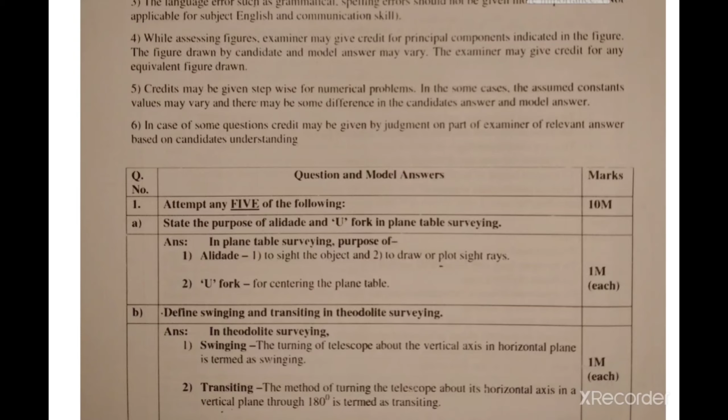Next question, define swinging and transiting in theodolite surveying. In theodolite surveying, swinging: the turning of the telescope about the vertical axis in the horizontal plane is termed as swinging. Transiting: the method of turning the telescope about its horizontal axis in a vertical plane through 180 degrees is termed as transiting.

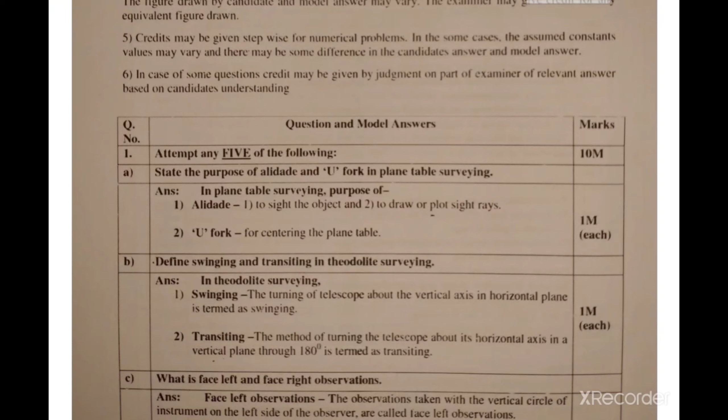What are face left and face right observations? Answer: face left observations, the observations taken with the vertical circle of the instrument on the left side of the observer, are called face left observations. Face right observations, the observations taken with the vertical circle of the instrument on the right side of the observer, are called face right observations.

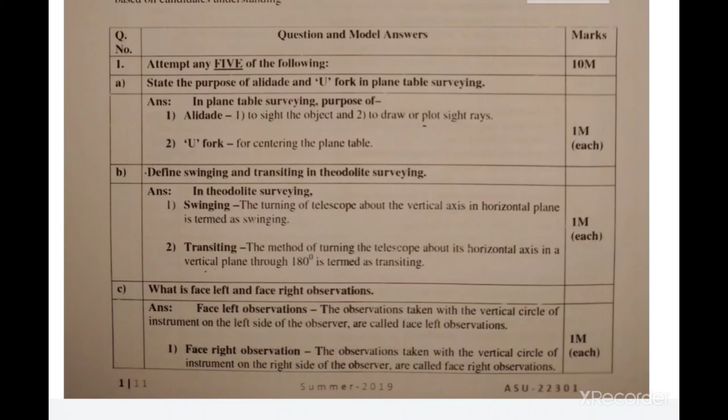After that, friends, state the principle of tacheometry. The principle of tacheometry is based on the property of isosceles triangles, where the ratio of the distance from the apex and the length of the base is always constant. d1/s1 = d2/s2 = d3/s3 = f/i = constant, where f is the focal length and i is the stadia intercept. Note: students may draw a figure to explain the principle. Give credit as 1 mark for figure and 1 mark for equation.

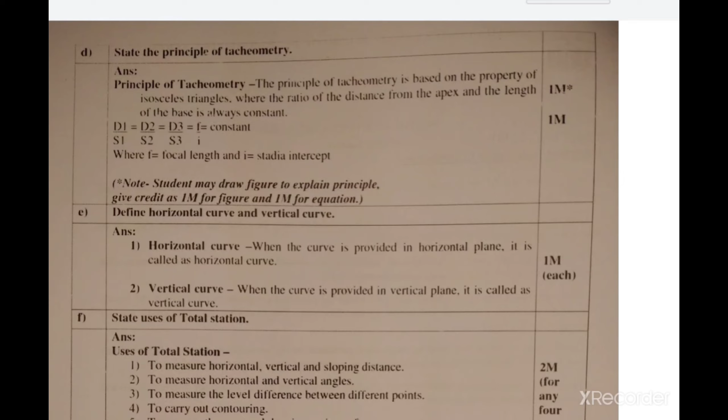Next question, state uses of total stations. Answer, uses of total station: to measure horizontal, vertical and sloping distance, to measure horizontal and vertical angles, to measure the level difference between different points, to carry out contouring, to prepare maps and drawings using software, to prepare layout of building, to measure area and volume.

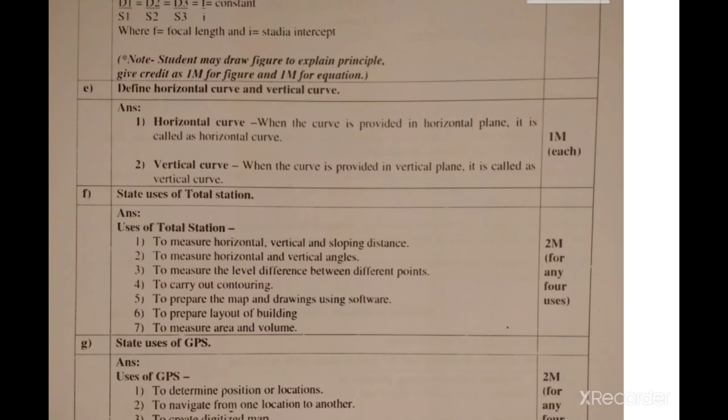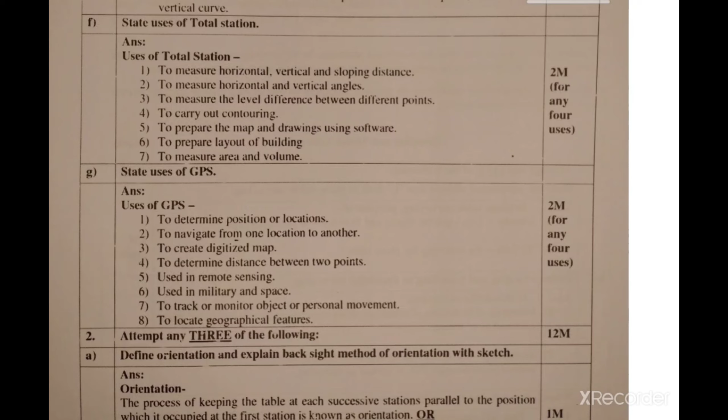The next question is state uses of GPS. Uses of GPS: to determine position or locations, to navigate from one location to another, to create digitized maps, to determine distance between two points, used in remote sensing, used in military and space, to track or monitor object or personal movement, to locate geographical features.

Attempt any three of the following, 12 marks. A. Define orientation and explain backsight method of orientation with sketch. Answer. Orientation: the process of keeping the table at each successive station parallel to the position which it occupied at the first station is known as orientation, or the process by which the positions occupied by the board at various survey stations are kept parallel is known as orientation.

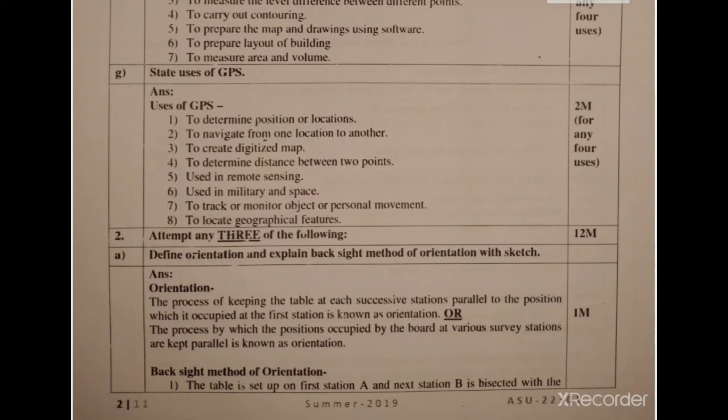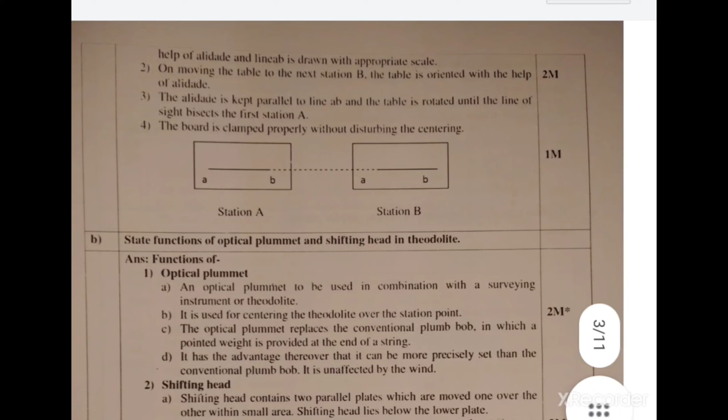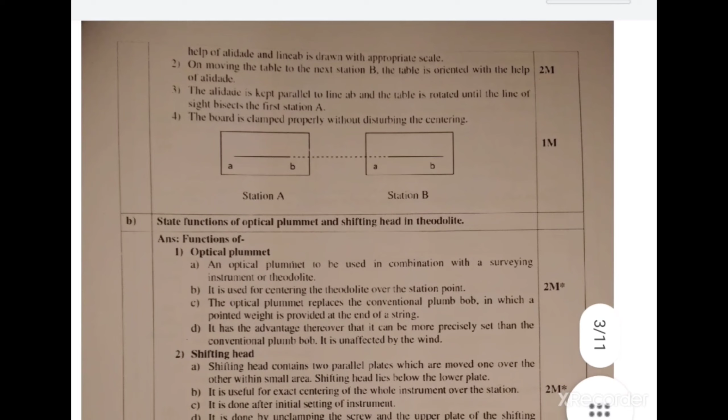Backsight method of orientation: the table is set up on first station A and next station B is bisected with the help of alidade, and line AB is drawn with appropriate scale. On moving the table to the next station B, the table is oriented with the help of alidade. The alidade is kept parallel to line AB and the table is rotated until the line of sight bisects the first station A. The board is clamped properly without disturbing the centering.

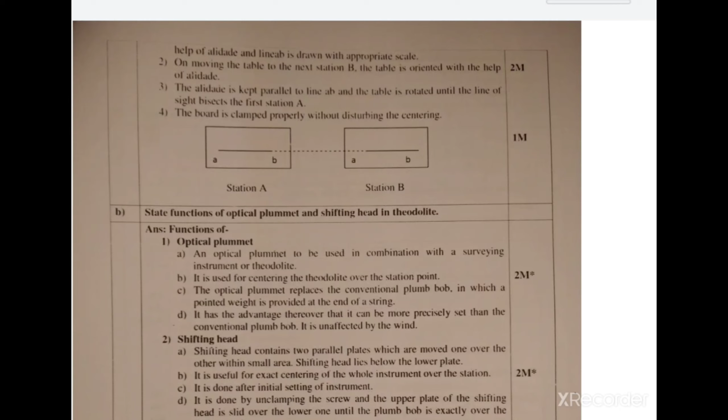Shifting head. The shifting head contains two parallel plates which are moved one over the other within a small area. The shifting head lies below the lower plate. It is useful for exact centering of the whole instrument over the station. It is done after initial setting of the instrument, by unclamping the screw, and the upper plate of the shifting head is slid over the lower one until the plumb bob is exactly over the station mark. 2 marks for any 2 points.

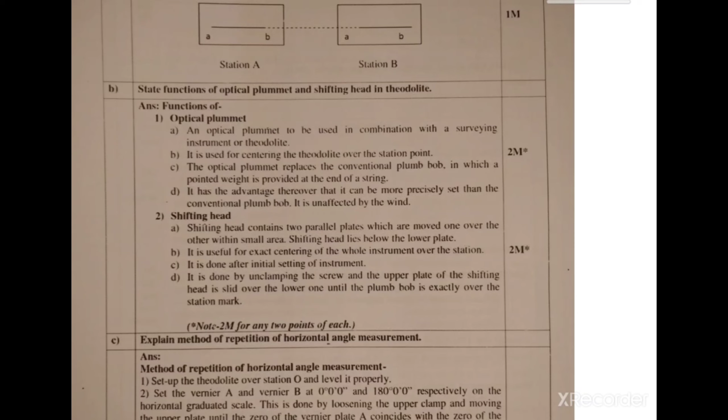Explain the method of repetition of horizontal angle measurement. Answer.

Method of repetition of horizontal angle measurement. Set up the theodolite over station O and level it properly. Set the vernier A and vernier B at 0°0'0" and 180°0'0" respectively on the horizontal graduated scale. This is done by loosening the upper clamp and moving the upper plate until the zero of the vernier plate A coincides with the zero of the main scale.

Tighten both the clamps. Loosen the lower clamp and bisect point A, and readings in vernier A and vernier B should be 0°0'0" and 180°0'0" respectively. Minor adjustment in reading is done by lower tangent screw. Loosen the upper clamp and bisect point B. Point B is accurately bisected using upper tangent screw. Tighten both the clamps and note the reading in both verniers.

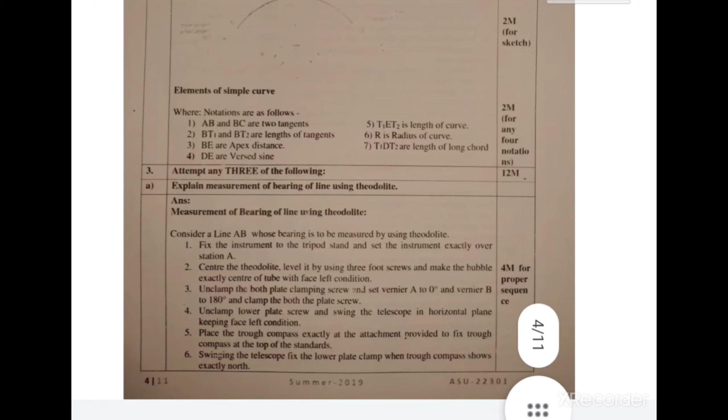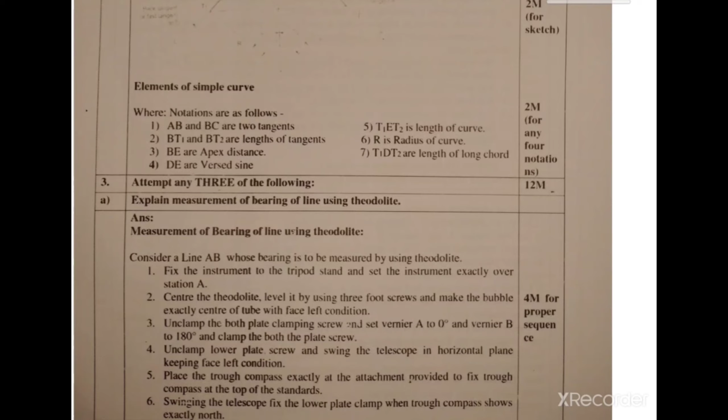Elements of simple curve.

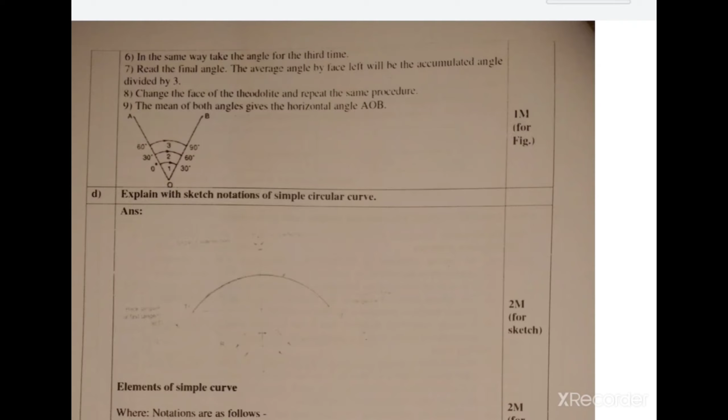The next question, explain the sketch notations of simple circular curve.

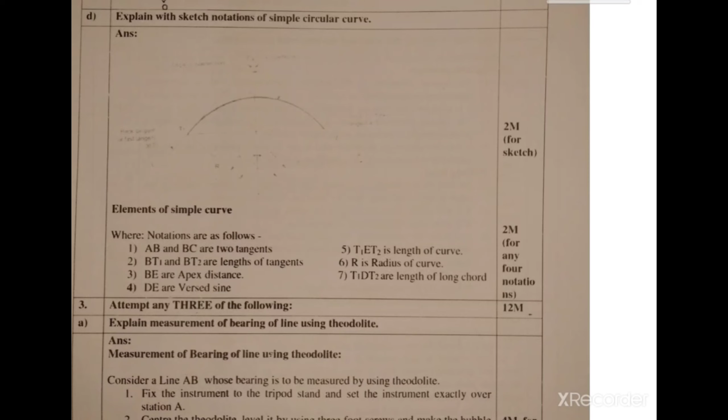BE is apex distance. DE is versed sine. T1ET2 is length of curve. R is radius of curve. Attempt any three of the following.

Explain measurement of bearing of line using theodolite. Answer: measurement of bearing of line using theodolite. Consider a line AB whose bearing is to be measured by using theodolite. Fix the instrument to the tripod stand and set the instrument exactly over station A. Center the theodolite, level it by using the three foot screws and make the bubble exactly central in the tube with face left condition.

Unclamp both plate clamping screws, set vernier A to 0 degrees and vernier B to 180 degrees, and clamp both the plate screws. Unclamp the lower plate screw and swing the telescope in horizontal plane keeping face left condition. Place the trough compass exactly at the attachment provided at the top of the standards. Swinging the telescope, fix the lower plate clamp when the trough compass shows exactly north.

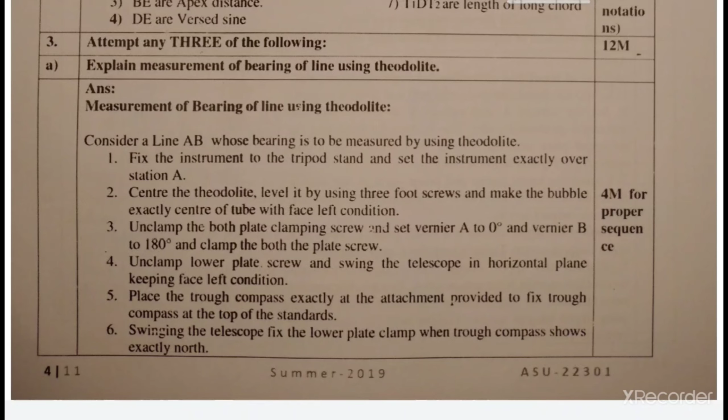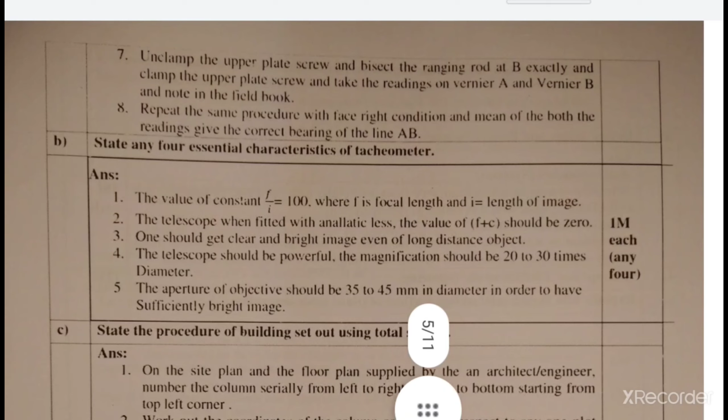Unclamp the upper plate screw, bisect the ranging rod at B exactly, clamp the upper plate screw, take the readings on vernier A and vernier B and note them in the field book. Repeat the same procedure with face right condition, and the mean of both readings gives the correct bearing of the line AB. State any 4 essential characteristics of tacheometer.

Answer: 1. The value of constant f/i is equal to 100, where f is focal length and i is length of image. 2. The telescope should be fitted with anallactic lens and the value of f + c should be 0. One should get a clear and bright image even of a long distance object.

The telescope should be powerful. The magnification should be 20 to 30 diameters. 5. The aperture of objective should be 35 to 45 mm in diameter in order to have a sufficiently bright image.

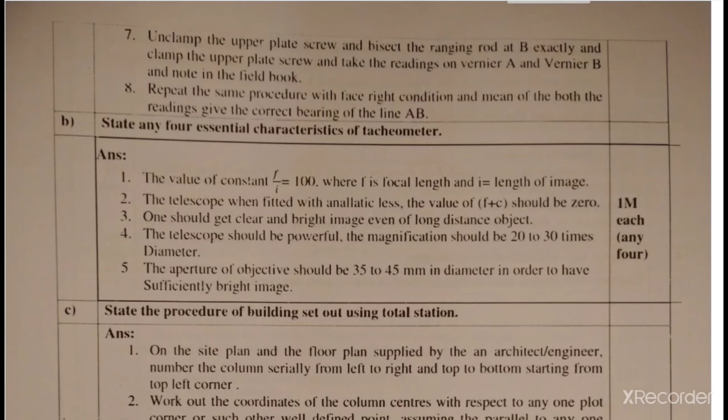State the procedure of building set out using total station. 1. On the site plan and the floor plan supplied by an architect engineer, number the columns serially from left to right and top to bottom, starting from the top left corner. 2. Work out the

coordinates of the column centers with respect to any one plot corner or such other well-defined point, assuming the parallel to any one building face as meridian. In case of a load-bearing building, one should work out coordinates at the points of intersection of all center lines.

Create on your personal computer an Excel document with 4 independent columns: one for column number and the rest 3 for N, E and H coordinates. Upload this file to your total station instrument by making use of the communication transfer software provided with the total station. Such software is invariably required to establish an interface between the external computer and the total station instrument.

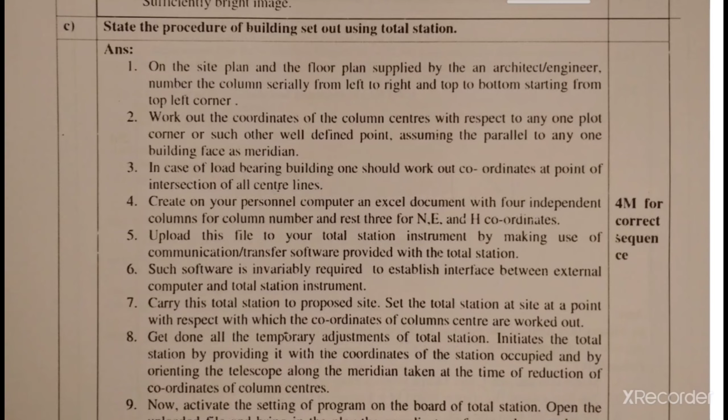Now, activate the setting out program on the board of the total station. Open the uploaded file and bring into display the coordinates of any column to be set out. 10. Hold the prism pole at the tentative position of that column on the ground. Bisect it and get its coordinates measured. In the next second, the machine will display the discrepancies in the coordinates of the point occupied and the point to be set out.

Get it understood, direct the reflector man accordingly to occupy the new position, bisect it again and get its coordinates measured to know the discrepancy in the coordinates of the point occupied and the point to be set out. Repeat the process till you get no discrepancy in the coordinates of the point occupied and the point to be set out. This way, get marked the centers of the rest of the columns.

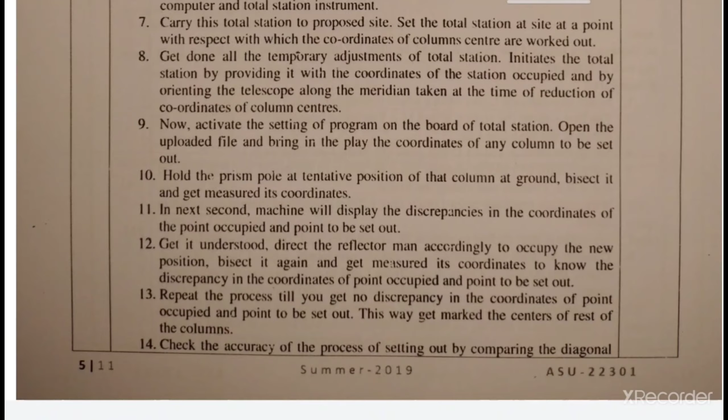Check the accuracy of the process of setting out by comparing the diagonal distances between the extreme column centers to their calculated values. The points so marked may be transferred to the sight rails on the sides so that they can be easily referred to by the workmen from time to time when the construction of the foundation is in progress.

Next question, define active and passive sources. Answer: active source system. The system in which irradiance from artificially generated energy sources such as radar is used is called an active system. Passive source system: the system in which the sun and earth's materials are used as natural sources so as to radiate electromagnetic energy of variable wavelength is called a passive system.

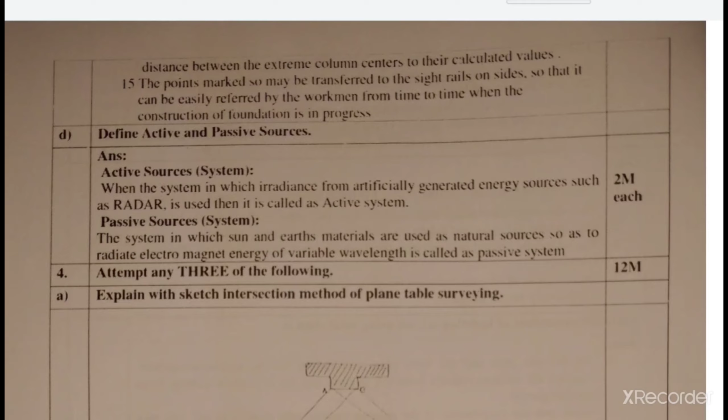Question 4. Attempt any three of the following. Question: explain with sketch the intersection method of plane table surveying.

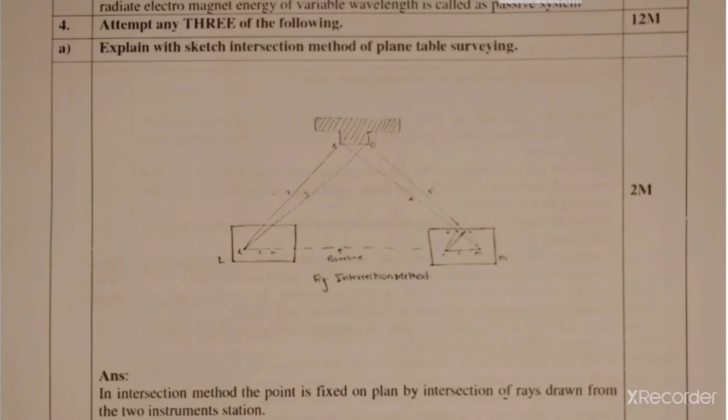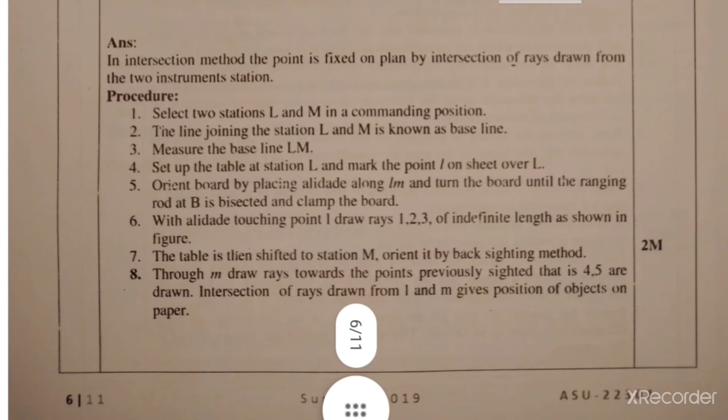In the intersection method, the point is fixed on the plan by the intersection of rays drawn from the 2 instrument stations. Procedure: select 2 stations L and M in a commanding position. The line joining stations L and M is known as the baseline. Measure the baseline LM. Set up the table at station L and mark the point L on the sheet over L. Orient the board by placing the alidade along LM and turn the board until the ranging rod at M is bisected and

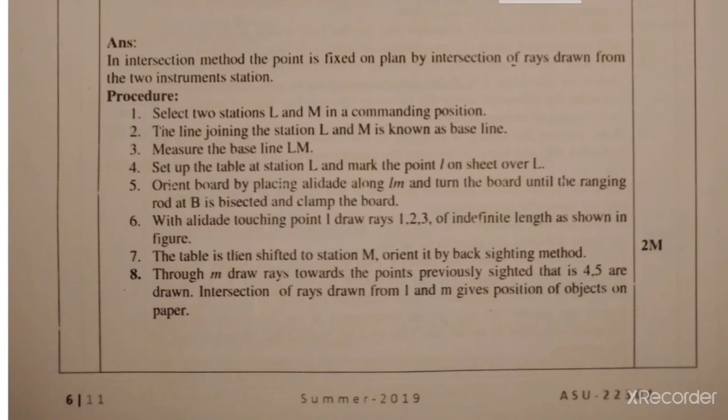clamp the board. With the alidade touching point L, draw rays 1, 2, 3 of indefinite length as shown in the figure. The table is then shifted to station M. Orient it by the back sighting method. Through M, draw rays towards the points previously sighted, that is 4, 5 are drawn. The intersection of rays drawn from L and M gives the position of objects on paper.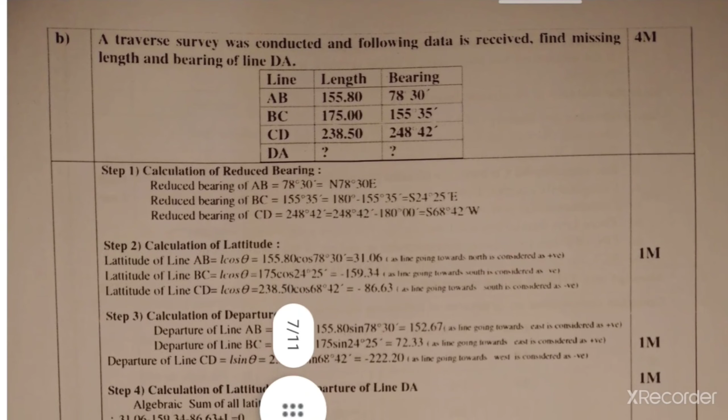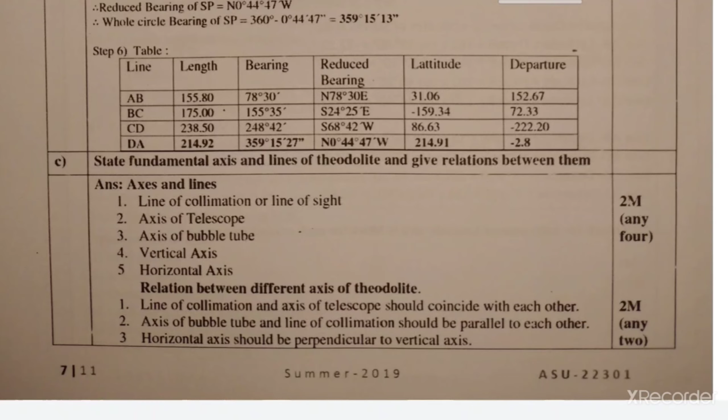Axes and lines: line of collimation or line of sight, axis of telescope, axis of bubble tube, vertical axis, horizontal axis. Relation between different axes of theodolite: the line of collimation and axis of telescope should coincide with each other. The axis of bubble tube and line of collimation should be parallel to each other. The horizontal axis should be perpendicular to the vertical axis.

Axis of plate level must be perpendicular to vertical axis. If the instrument has fixed vertical circle verniers, it must read 0 in leveled position.

State the features of electronic theodolite. Answer: Following are features of electronic theodolite: dual side display and keyboard with push button keys, built-in illumination for night operations, rechargeable nickel cadmium battery with auto power cutoff, compatibility with EDMS, communication port with RS-232C compatibility. Three keys commonly used are on-off key for starting or ending the measurement, and RCL for recalling data from memory as well as changing sign plus or minus.

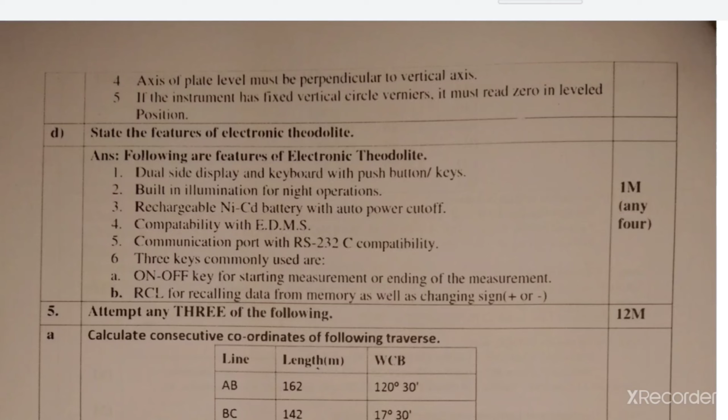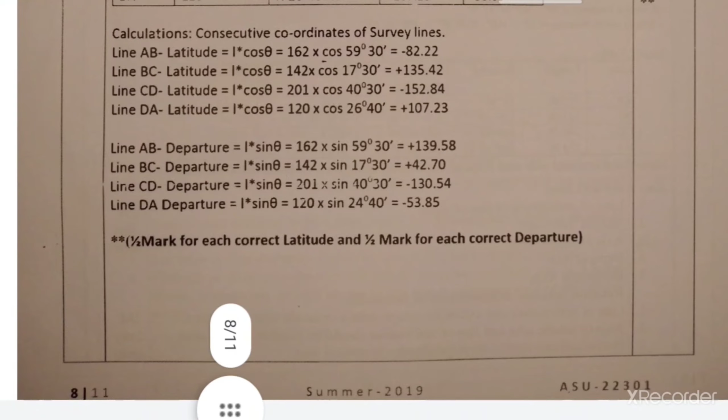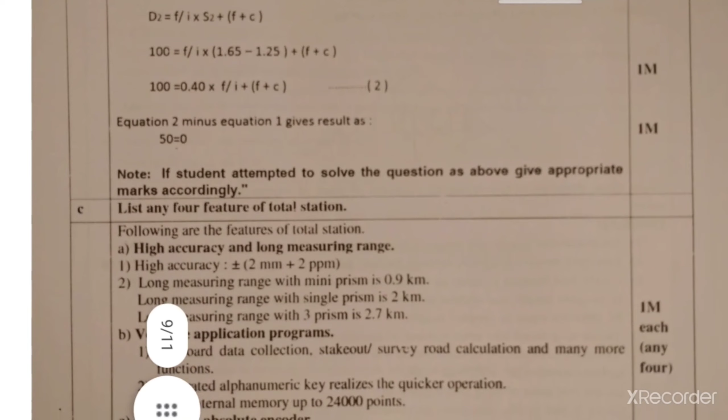Question 5, attempt any 3 of the following. This question is actually a sum, which will be taken in the next lecture. The next question is also a sum, so we will skip them.

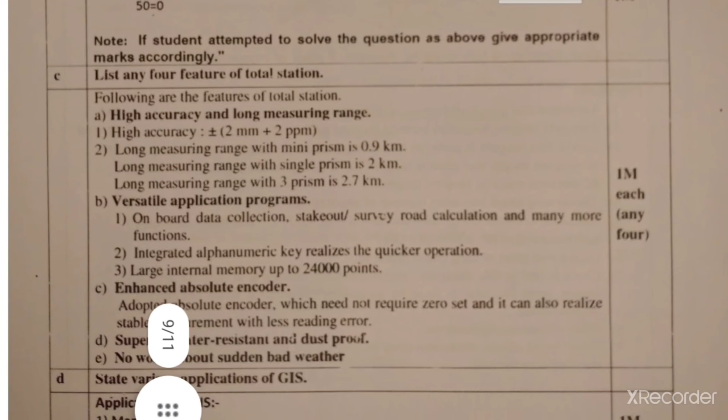Next question: list any 4 features of total stations. Following are the features of total station: high accuracy and long measuring range. High accuracy plus minus 2 mm plus 2 ppm. Long measuring range with mini prism is 0.9 km. Long measuring range with single prism is 2 km. Long measuring range with 3 prism is 2.7 km.

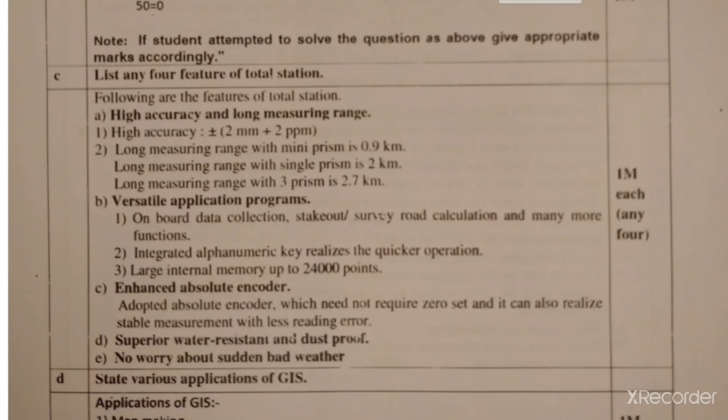Versatile application programs: onboard data collection, stakeout survey, road calculation, and many more functions. Integrated alphanumeric key realizes quicker operation. Large internal memory up to 24,000 points. Enhanced absolute encoder is adopted which need not require zero set, and it can also realize stable measurement with less reading error. Superior water resistance and dust proof, so no worry about sudden bad weather.

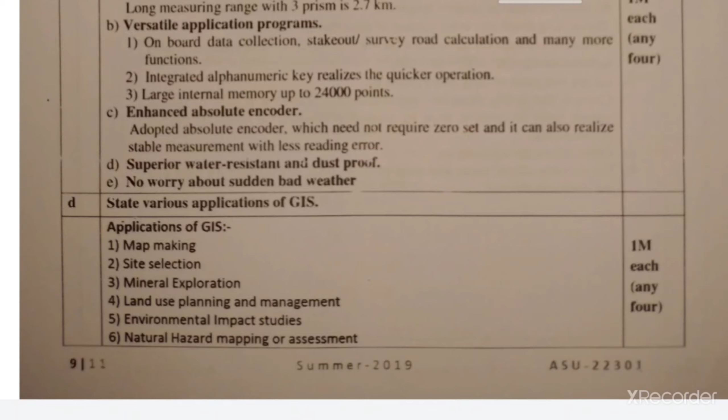Next question: state various applications of GIS. Map making, site selection, mineral exploration, land use planning and management, environmental impact studies, natural hazard mapping or assessment, water resources availability, and road network analysis and planning.

Question 6, attempt any 3 of the following, 12 marks. State errors eliminated by the method of repetition. The errors eliminated by the repetition method are: errors due to eccentricity of verniers and centers, which are eliminated by taking both vernier readings and averaging them.

Errors due to inadjustments of line of collimation and trunnion axes are eliminated by taking both face left and face right readings. Errors due to inaccurate graduations are eliminated by taking readings at different parts of the circle. Errors due to inaccurate bisections of the object may compensate each other. Errors due to improper leveling can be minimized.

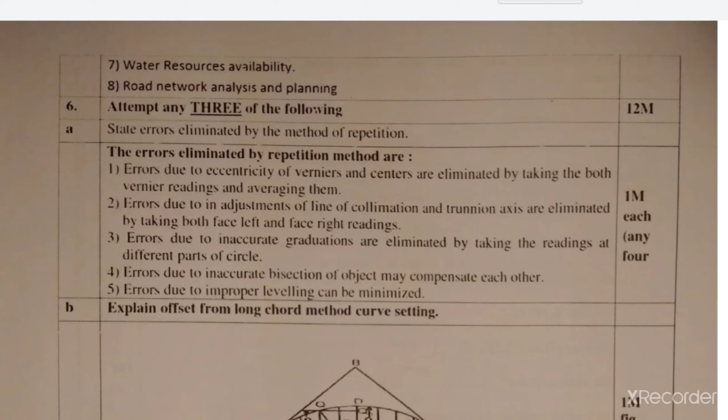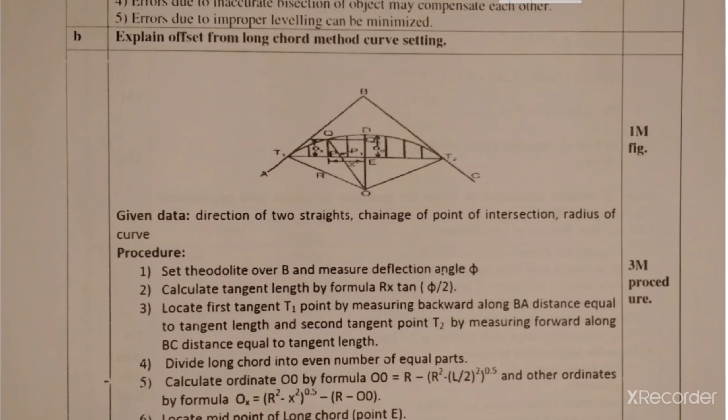Next question: explain offset from long chord method of curve setting. Given data: direction of two straights, chainage of point of intersection, radius of curve. Procedure: set theodolite over B and measure deflection angle phi. Calculate tangent length by formula R multiplied by tan phi by 2.

Locate the first tangent point T1 by measuring backward along BA a distance equal to tangent length, and the second tangent point T2 by measuring forward along BC a distance equal to tangent length. Divide the long chord into an even number of equal parts. Calculate ordinate O0 by the formula O0 equals R minus the square root of R square minus L upon 2 square.

Calculate other ordinates by the formula OX equals square root of R square minus X square, minus R minus O0. Locate the midpoint of the long chord, point E. Chain is laid in the ET1 direction. Perpendicular is erected at E, say by optical square.

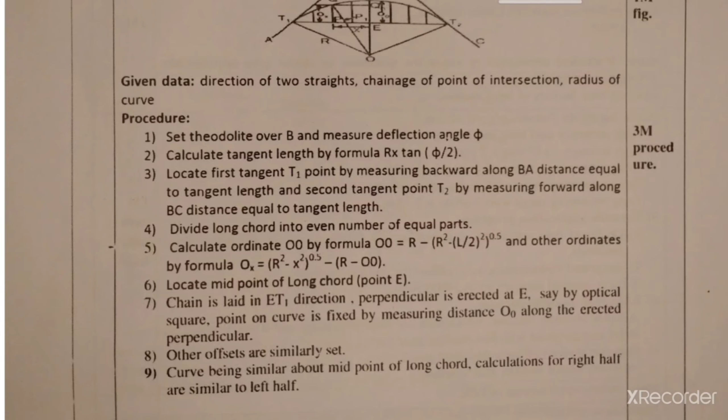The point on the curve is fixed by measuring distance O0 along the erected perpendicular. Other offsets are similarly set. The curve is symmetric about the midpoint of the long chord, so calculations for the right half are similar to the left half.

State the principle of EDM with sketch.

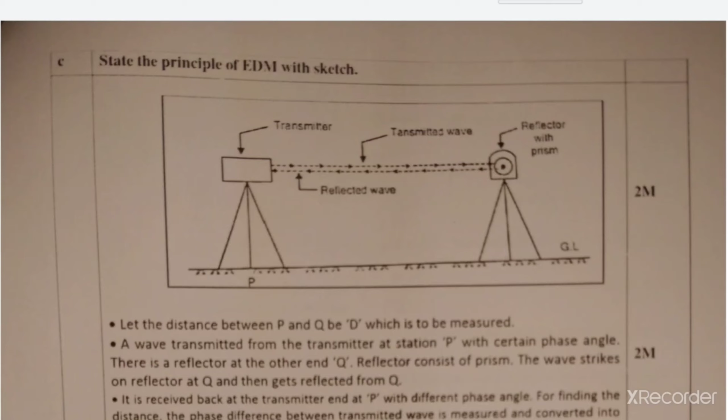Let the distance between P and Q be D, which is to be measured. A wave is transmitted from the transmitter at station P with a certain phase angle. There is a reflector at the other end Q. The reflector consists of a prism. The wave strikes the reflector at Q and gets reflected, then is received back at the transmitter end at P with a different phase angle. For finding the distance, the phase difference between transmitted and reflected waves is measured and converted into distance.

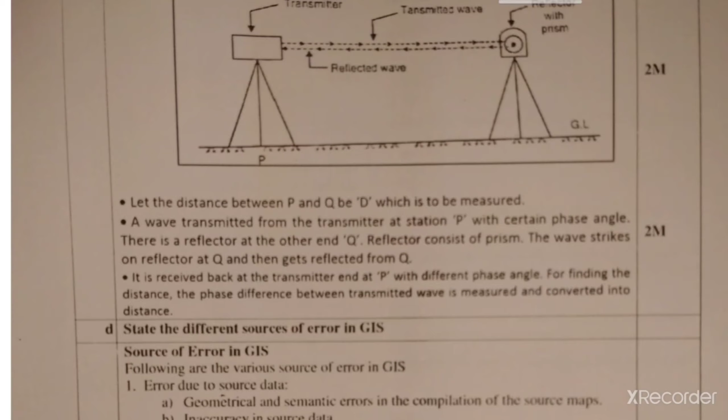State the different sources of errors in GIS. Following are the various sources of errors in GIS.

Error due to source data: geometrical and semantic errors in the compilation of the source maps, inaccuracy in source data, inaccuracies due to the vague character of natural boundaries, error due to source data being out of date, limitation of survey equipment, and errors occurring due to data input.

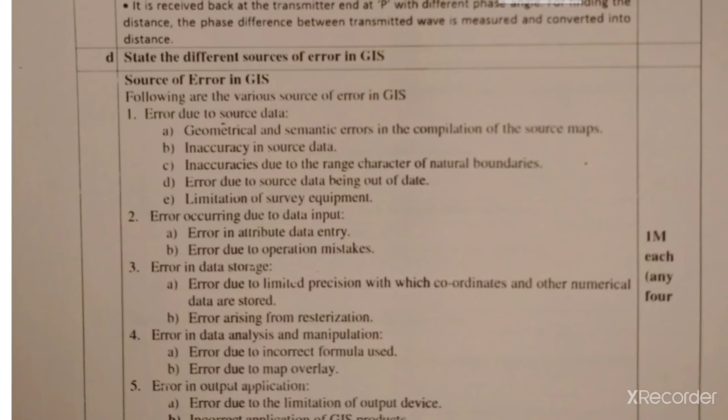Error in attribute data entry, error due to operations mistakes, error in data storage due to limited precision with which coordinates and other numerical data are stored, error arising from rasterization, error in data analysis and manipulation, error due to incorrect formula used, error due to map overlay, and error in...